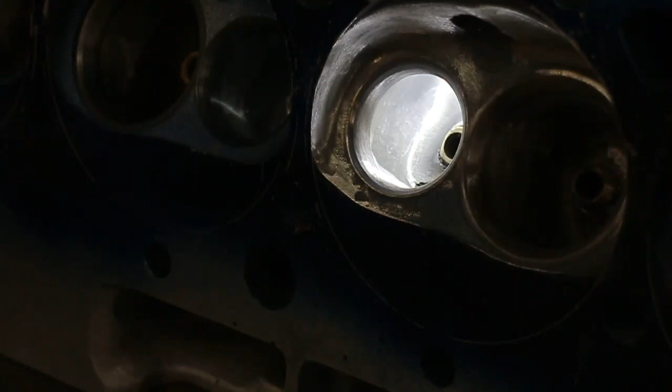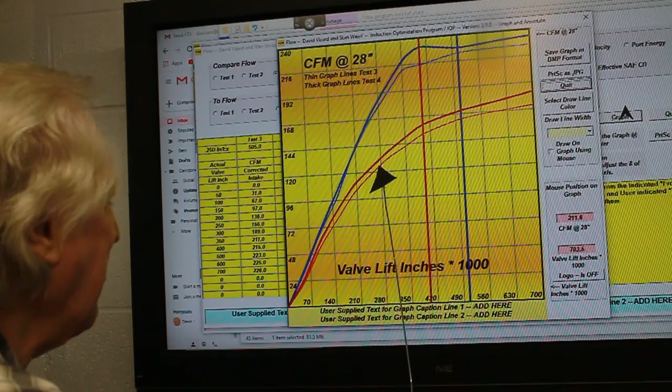We're going to now see if this extra bias emanating either to or away from the center of the cylinder pays off. Did that move pay off? Well, you bet it did. Look at this: increased our exhaust everywhere over the previous test. On the intake, same thing. But look, it dipped after that. Maybe we still don't have enough bias. Let's just check that out.

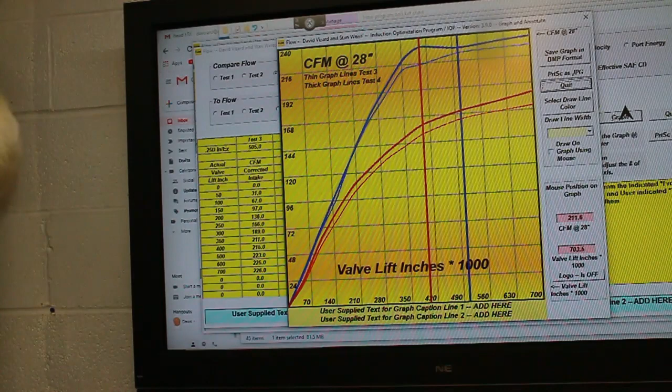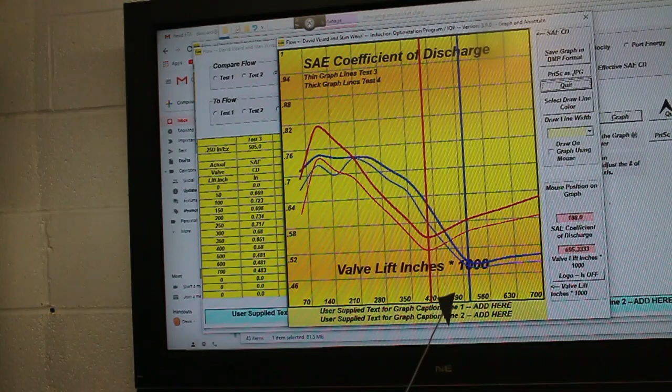Here's the discharge coefficient curves. We've moved everything up here, but look, it barely increases any more than it did before. So we need to give that some attention.

Well, so far I've walked you through these port mods a small increment at a time. If we keep on like this, we're going to be on this for about 2 hours. So I'm going to jump a few steps here, but each of those steps follows the same routine as we've already done. I'm going to increase the bias slightly, increase the width of the port slightly right across the port, and look at a few other details, such as the way on the intake the air turns on the top of the port into the cylinder center side. If you look down the intake port of any small block Chevy, you will see that the intake port, or the valve, is in a flow shadow on that side. We've got to try and get that air to go around the side as easily as possible. So we're going to look at mods like that and see where that gets us, and I'll explain each step of the way how that goes.

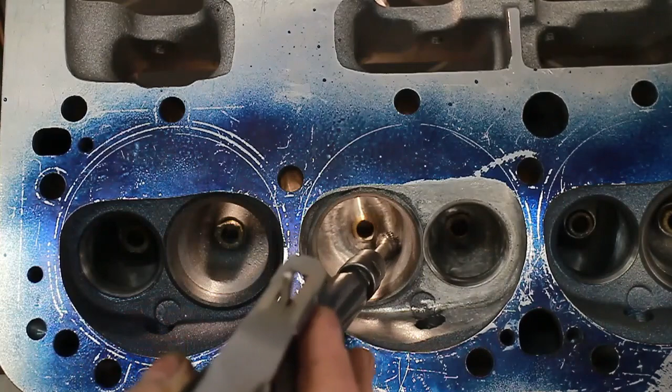To do this part past the bowl here, we used a ball cutter, half-inch ball cutter, and that's about the width you need to do there. Now, this is a little touchy point here. If you make this too big, you cut the swirl. If you have it too small, what happens is the gas speeds here are high, and they come up here and they prevent this stream from, A, entering the cylinder as easily, and B, swirling. So too big or too small, and you pay a price, either in flow or swirl or both.

Right, so that's the one to use for that. On this side, I used this ball wheel, but I finished it off with this 3/4 inch emery thing. So I made it as wide as I needed to and then finished it off with those. The rest of the port I did with this half-inch, 60 grit emery roll. Right, so that does it for the down the bore of the intake, or down in the bowl. Let's take a look at where the air goes in.

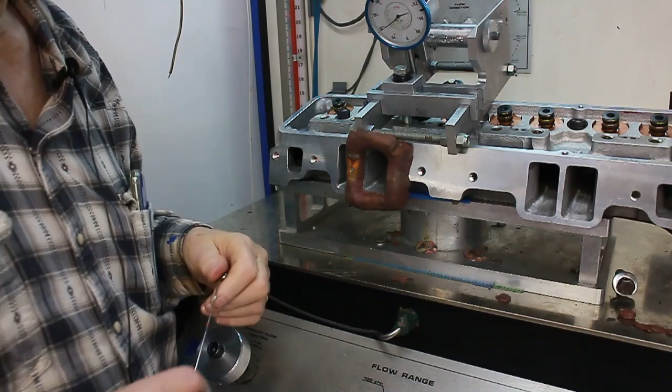So what am I doing here? I'm using this flow ball to check to see where the flow is going. Now, basically no metal has been removed from down here, and the interesting thing is, if we put the ball in here, it makes no difference to the flow. So basically this part of the port's redundant. On the other hand, where I spent the time doing the radius at the top of the port here, getting this wall here with a nice curve on it, if I get the ball at a certain position, the flow drops 25, 30 CFM. So that's a busy area, that's the place we need to work on.

But I don't think we can take much more out of that. But anyway, let's take a look at what we've done and then take a look at the results.

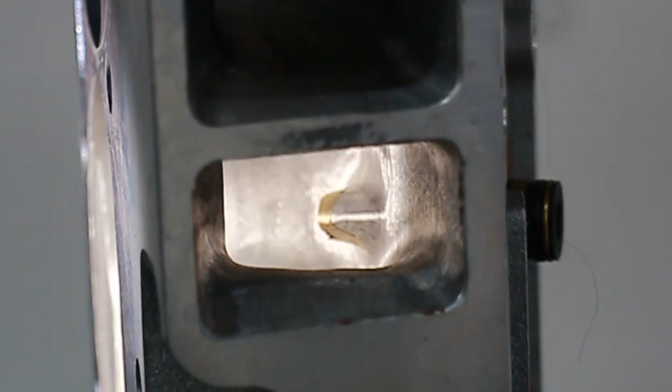What I want you to see is where I placed the flow ball when doing that test just now. Here on the roof of the port, this is a critical area. This radius needs to be as smooth and generous as possible, and you can actually widen it as well.

You can't go too far here. This is the pushrod pinch, and this has been widened to within 50 thousandths of the pushrod hole. A little bit of metal has been taken off on this side to get the area across here as large as conveniently and functionally possible, but almost nothing has been taken off here other than just to smooth it out. Right, so that's what we have for the throat there.

The actual area here has only increased very marginally. All the work on the port resulted in about an 8 cc gain in port volume, so not big.

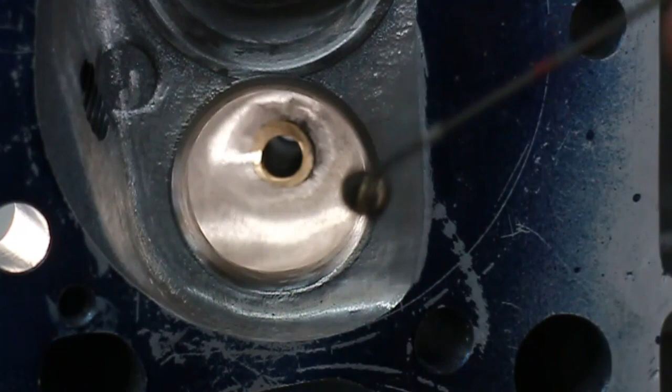Here's a shot looking down the exhaust port. What I've done here is take this wall down so that it's moved much nearer the cylinder wall, which is of course here, because the flow is going to be going out the cylinder about like this. So we need to give it room here.

It has a tendency to want more room this side than on the other side. That doesn't mean we ignore that, but basically we do the other side around here, the top side, with that 1/2 inch ball, but we do this here. We can do that with a 1/2 inch ball, but we need to make it wider, right here, and finish it off with one of those 3/4 inch emery rolls that I've just shown you.

Now coming off the seat here, we can skinny down the width of this radius and get that round, because once it gets past a certain point, it has very little effect on the flow. We don't want too much flow going out this side, because it'll shoot across the port that way and jam up the flow that wants to come this way, which is the preferred method of going out.

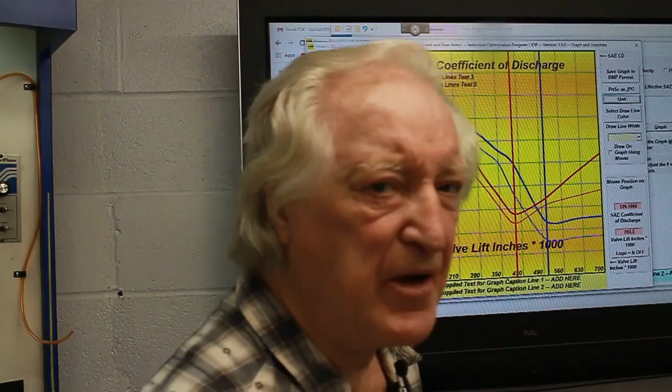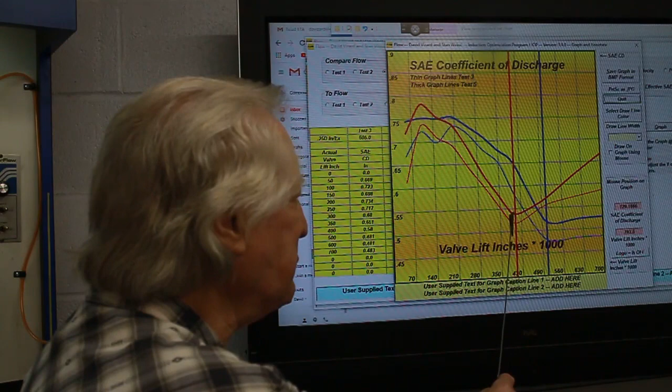Here is our CD curve, and you can see the form that the exhaust is taking. Notice how it's climbing very steeply after the lift gets past 0.25D. Here, the intake still is not climbing, but we'll give that some attention and see if we can fix that.

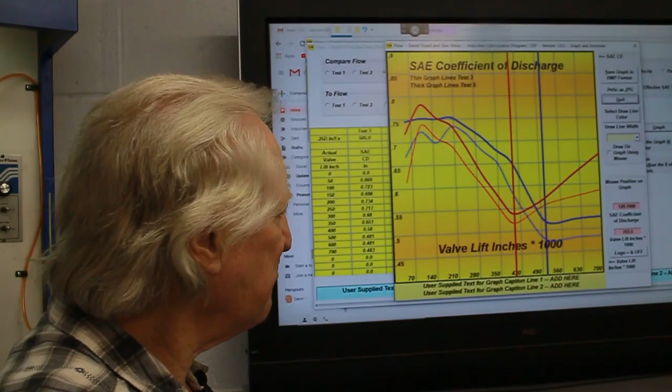Now, we took about 8 cc's out of the port to get to this, so let's have a look and see what our port velocity looks like.

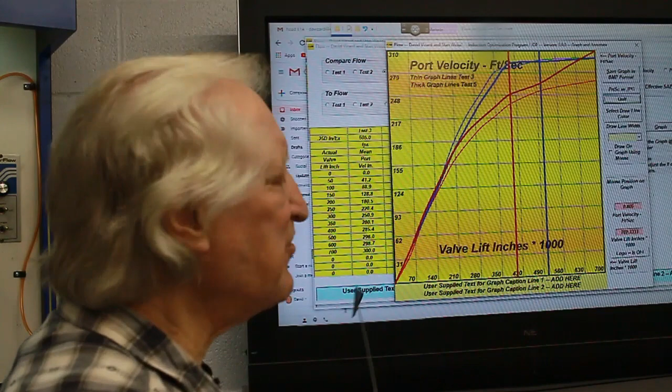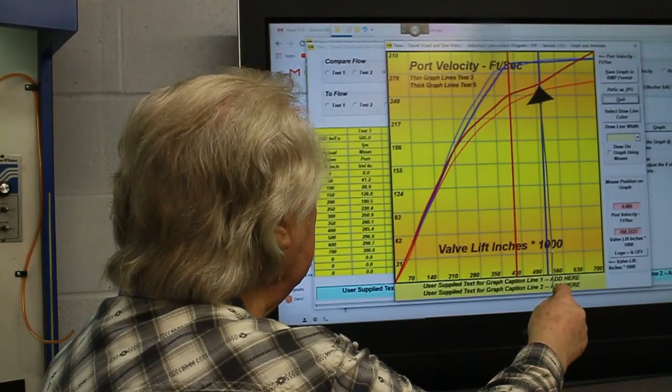Well, here we are, port velocity. We are sitting right on the 300 feet per second speed for the intake, and we are exceeding it at 700 on the exhaust, but we really need to have a little bit more speed in around here, so it's about 280. Maybe some work on the exhaust seat will help that, especially as it needs to get from the quench side into the port easier than we're allowing it with the pretty roughed up seat job that we've got currently existing on the head.

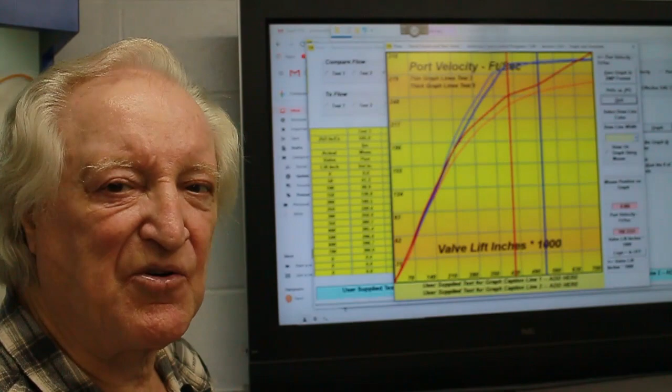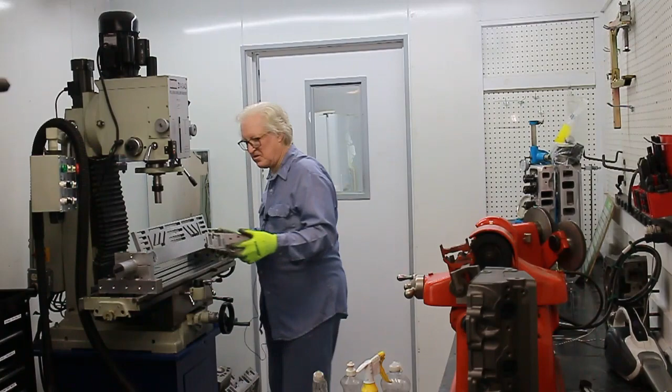Well, I've just done a finishing cut on the chamber we're working on, so let's take a look at that. Did that with my 3D Goodson cutter setup, which is done right. It's almost as good as a Serdi.

Here is the test cylinder or test chamber seat cut. I used a 3D pilot and guide like this. This is my bowl cutter. You see the form on that cutter there? It very closely matches that. So I'm going to try a cylinder over here using this because it will be much quicker and more consistent.

Anyway, seat details. Looking down on the seat, 50 thousandths wide. That's looking down this way. Looking at the seat across its width, that's 71 thousandths, right? That's Pythagoras' theorem to work that out. Anyway, a few points on this: any less than 50 thousandths on the bore, on the inside diameter compared with the outside diameter, you'll lose flow. This is the optimum size and it works very well for street or race.

The OD of the guide, let me get a caliper here. I don't know if you can see this because it will be upside down, but the seat is about 3 thousandths wider.

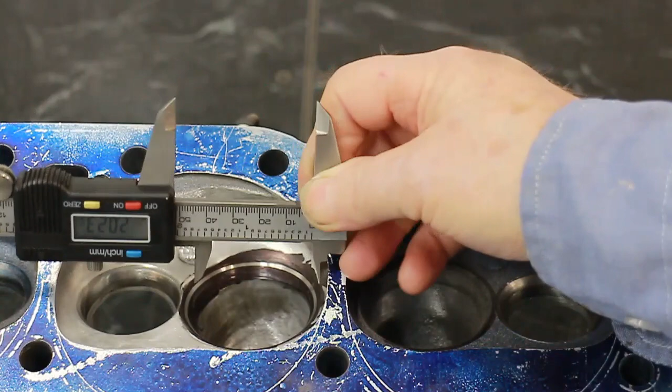About 3 thousandths wider than the valve OD. I like to cut them like that because it just seems to hang on a little bit better on the flow, and it flows slightly worse in reverse. Very small, but that's it. The best thing is about 3 thousandths to 5 thousandths bigger than the valve. Okay, I think that's it.

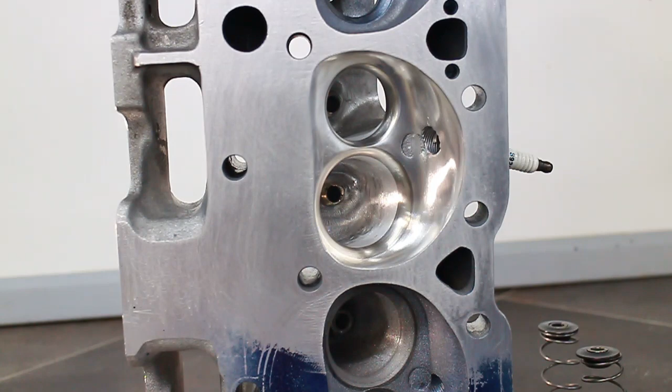Let's just get the cleanup done on that seat and we'll retest our cylinders. Seat's cut and the chamber finished off. But before I loaded it all onto the flow bench, what I wanted to do was to show some details.

First, if you look very carefully, you'll see there's a witness mark here. That's part of the original casting, right? It's not poor workmanship, not polishing it out. This area here, just here, you need to try and not take any metal at all off because it doesn't increase flow, it decreases it. We don't want air coming around there and out there. This could be part of the reason the port is getting shut off at high lift.

The seat itself is cut and I've polished it. Now I've got a technique I teach my students here, how to polish a seat with a tool that I've got, which takes off edges but has almost no effect on flat surfaces like the seats. Done on both valves here, right? The chamber's polished because that prevents stuff sticking to it as easy.

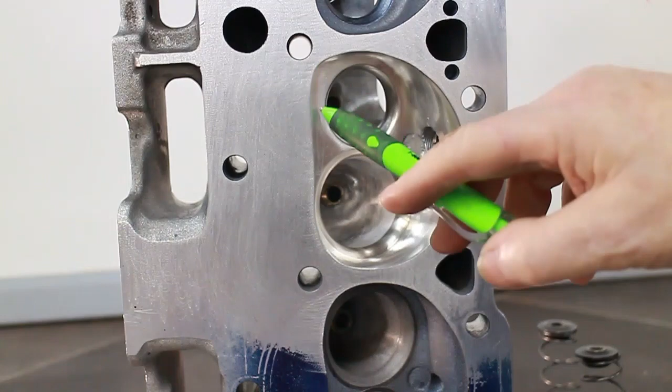Now, this area here, if you look at the pen reflection, you'll see that it's curved. This here curves it, this surface here curves into that one. Flattening this out like this is very important. This is 6 or 7 top end horsepower and no loss of torque anywhere in the power curve. Ports, seats polished on this, so that's good, and these are all area ruled.

One aspect that I didn't mention is, and you'll be hard pushed to see this, but the roll into this turn here, the radius here and here, that's from this segment right round to about here, is a bigger radius than this one. So the actual hole beneath the valve is shifted that way so that we get a bigger radius here where most of the air is flowing, and we try and cut the airflow here so that it doesn't come out, turn this way and affect the air trying to turn that way.

Right. It is now flow bench time.

Yeah, that flow testing looked good. Let me just score it and then we're done. As you can see, we've cracked the 200 CFM mark on the exhaust, and we've passed the 260 on the intake. It's not too bad a number for still what is a small port.

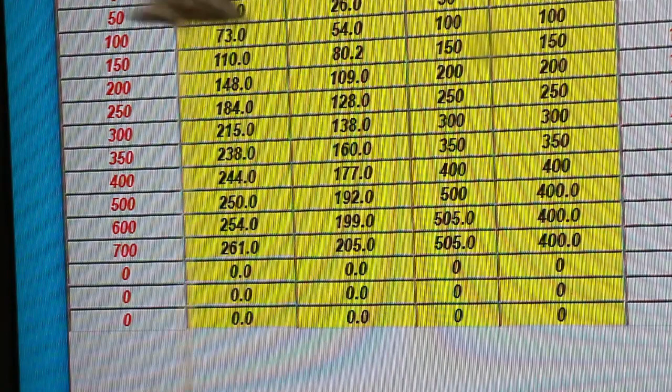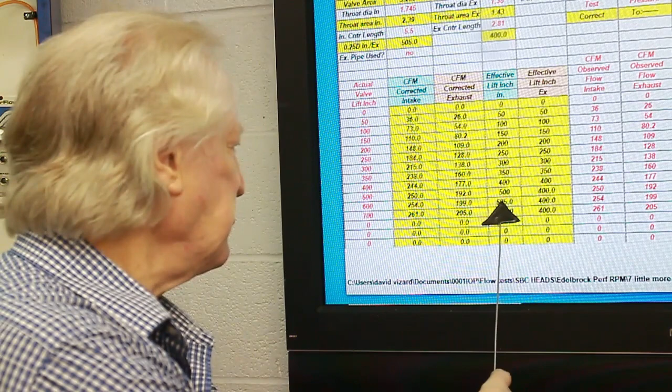Now, my son-in-law, who is a NASCAR engine builder and head porter, he's done a lot of pro stock stuff, and I believe he did Jimmie Johnson's engine when he won the Busch Championship. But anyway, he's got a benchmark which I think is very relevant on the exhaust. If you've done the exhaust well, you should be able to crack the 200 CFM at 500 lift. A proviso with that though: I think that's more in line with a port that's been slightly raised rather than the stock position of the Edelbrock port here. But we're getting close.

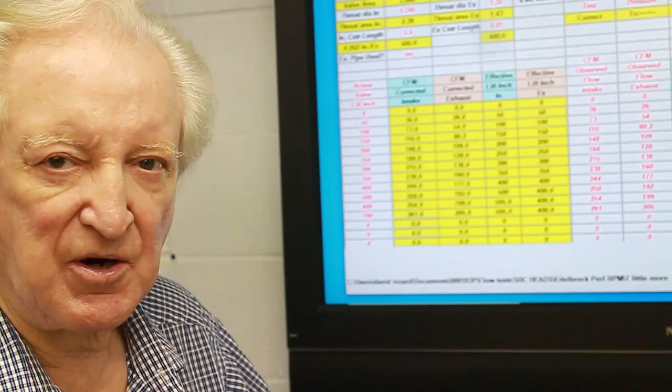Here's the CFM of flow test prior to the one we're looking at now and our current one. As you can see, pretty big gain in the exhaust here. But we've kind of developed a dip there. I don't know really what that is at the moment. Probably some little disturbance in the exhaust. But on the intake, you can see that we're starting to conquer that leveling out at the top here.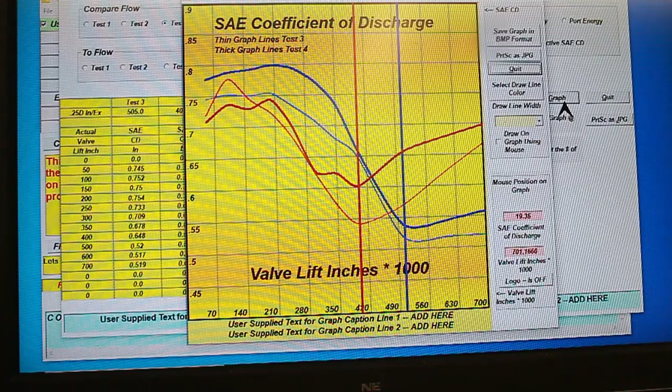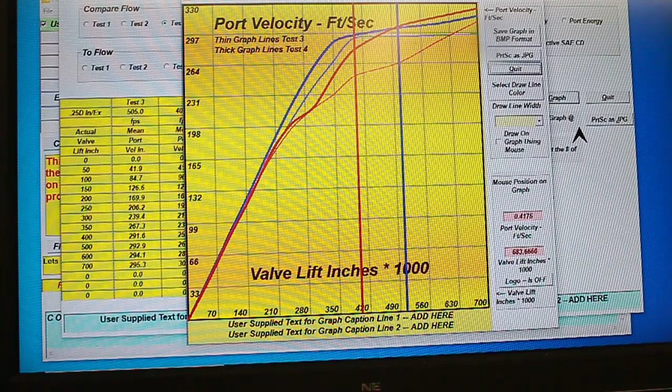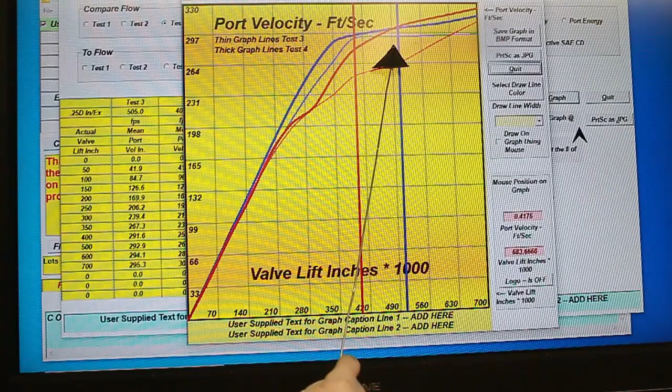But we need to check to see if this has come at the expense of any velocity. So let's look at velocity now, and there's the velocity. What we've done is we've increased the efficiency to a greater extent than we've increased the port volume. So not only do we have more flow, as shown by these two thick lines here, than the previous test, but we have more velocity, and that translates into more port energy.

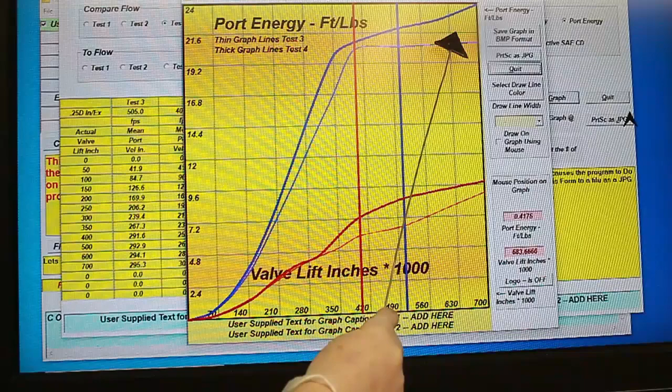We've gone up with port energy, and we've gone up on the intake, and we've gone up this much on the exhaust. This is all good. It improves the ramming efficiency and the lower speed tractability, especially when you've done it on the exhaust.

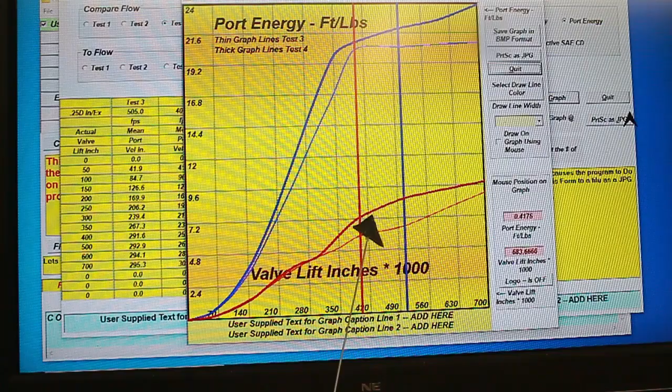Right, let's do our next test where we go in and detail out the ports. That is the finished finish on there, the final finish. Doing the lighting for some of this finished porting work can be a little difficult. It's out of screen at the moment, but I'm holding lights all over the place because I just don't have enough stands for it. Anyway, there you can see what a finished port and ports and chambers look like.

However, just visualizing it like this is not going to tell you very much. So what I'm going to do is take a mold of these ports, and you'll be able to see what's done far easier. Here's an intake port mold.

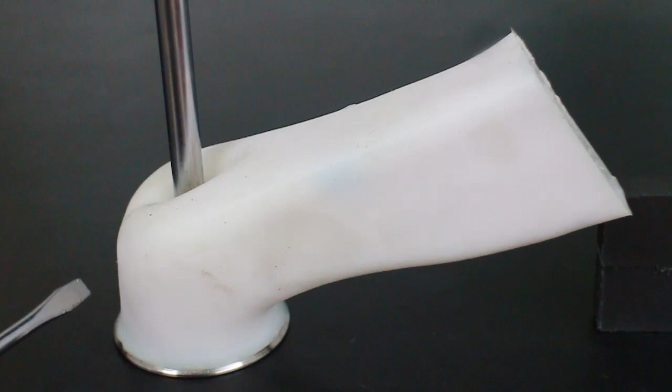Points to watch are this here. We can't get much more of a curve in here, not much metal has come off here, so this form here is not what I would call optimum, but it's what we're stuck with if we can only remove metal. Now, note this turn here. This is a big radius here and less of one there.

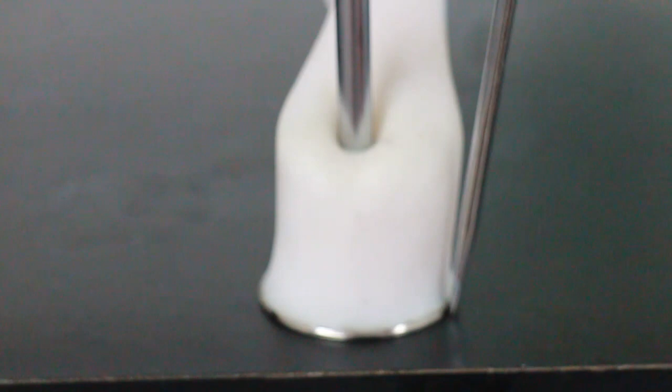Now let's just rotate the port so that we can see it end on with the bias. If you look carefully in this shot, you'll see how the port leans like this. The air comes in like this and goes out through the center of the cylinder. Note that this area here is cut away more than this area here.

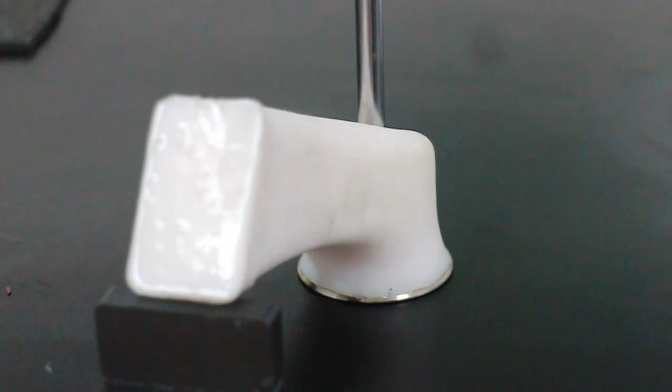In spite of the fact we've taken a mold, it's still difficult to see, but this turn here is critical. The radius on this wall here needs to be as large and as smooth as possible.

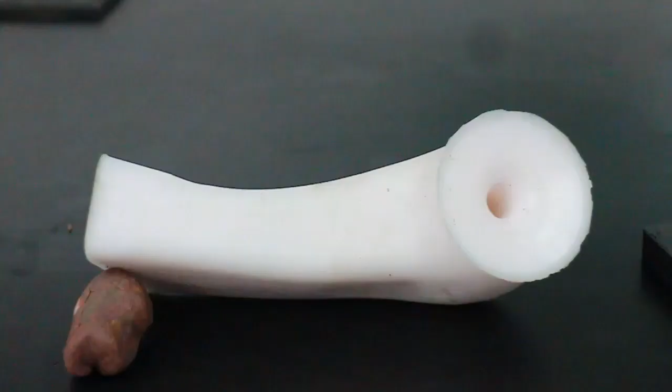You do not need to widen the port at the bottom here. All of the air is flowing, I say all of it, the majority of the air is flowing above about that line of my screwdriver there. This is a busy area right down through there, and so is that. That's where you should focus your attention. Do not widen the bottom of the port here, this is the floor, any more than you have to.

Another point to note is the short turn radius. Notice how it turns the sharpest by the seat, and the radius gets bigger and bigger as we go around.

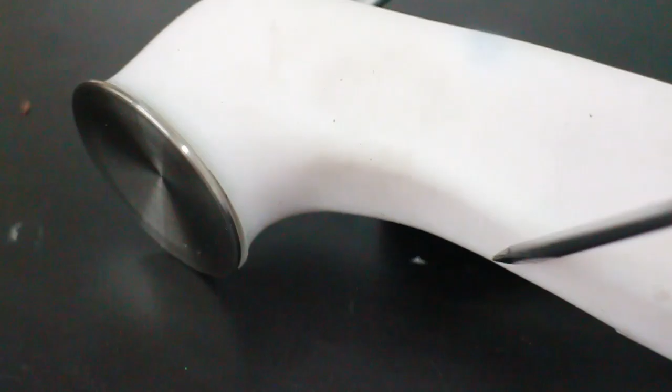By comparison with the intake, the exhaust is pretty easy to do. First off, notice how there's more metal off out to let the exhaust, it comes out the cylinder like this and out. So there's more metal off this side, and you can see it leans. Right, that's the bias on it.

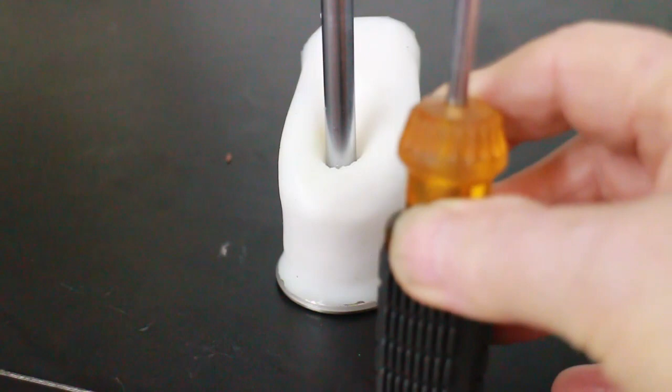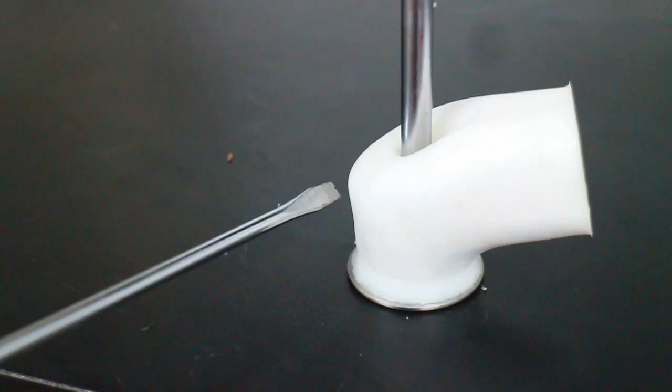Like the intake, the short side turn is critical, right? Starts sharp there and then comes out to a bigger radius. This wall here, the short side, the long side turn is almost stock. I'm not too happy with this straight up design, but that's what we've got. There's almost no material off here. So don't take any more than you have to.

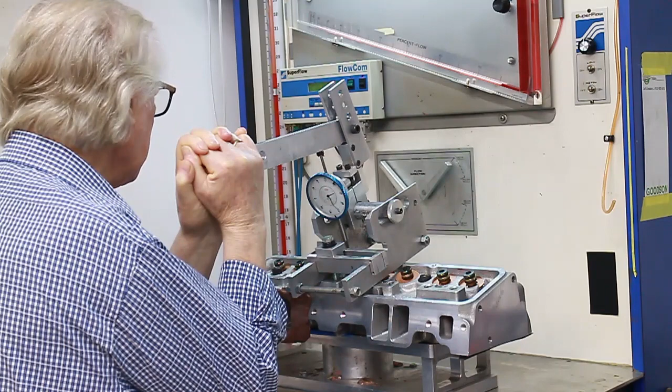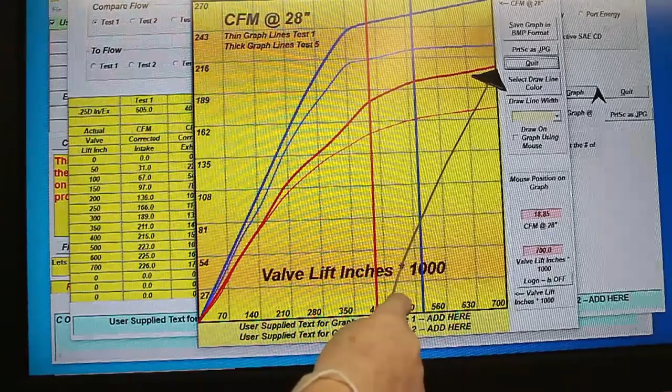Well, that was the last of the flow tests on the final detailed port. And it's looking good. So let's just check our results here. Here's our final figures. We're over the 200 mark by a respectable amount on the exhaust, and we are just shy of 270 up here. I did check at 50 thousandths higher lift. Still didn't make 270, it just leveled out at about 269.

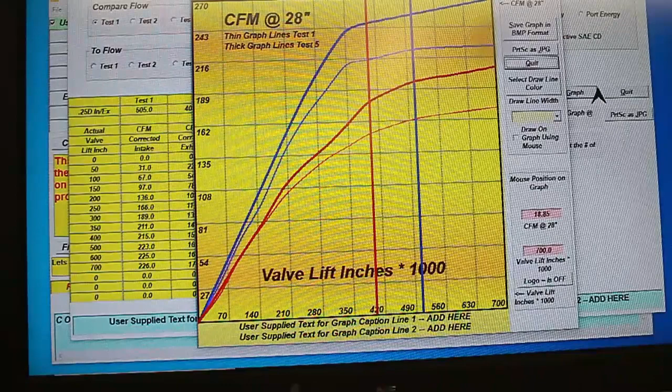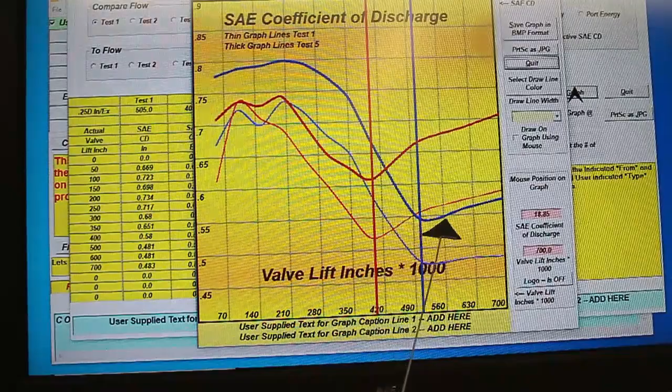That's all looking good. Now then, next move, just for a case of reference, let's have a look at our efficiency curves. Look at this. This is why we're doing so well here. Efficiency of everything has gone up a bunch.

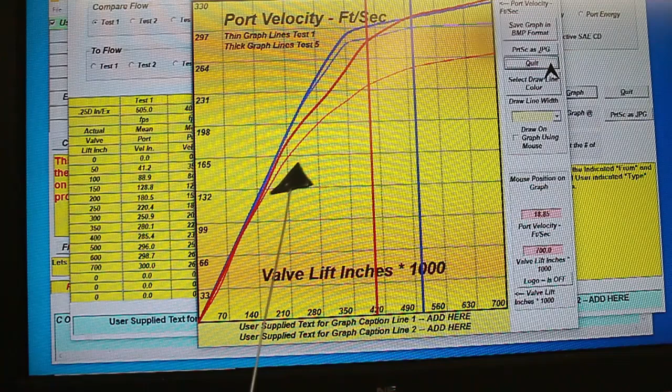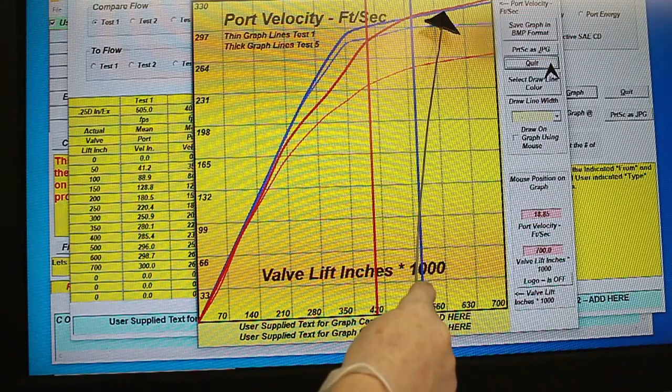Right, now let's look at the mean port velocity before and after. And what we have here is all that extra flow, plus we are over the magic 300 feet per second at the valve lift we're going to use. I think we're about 306 on both intake and exhaust. So we've scored well on that. Now let's have a look at the port energy.

Right, calculate, graph. Port energy, we are way up on the stock one. So that's a winner there.

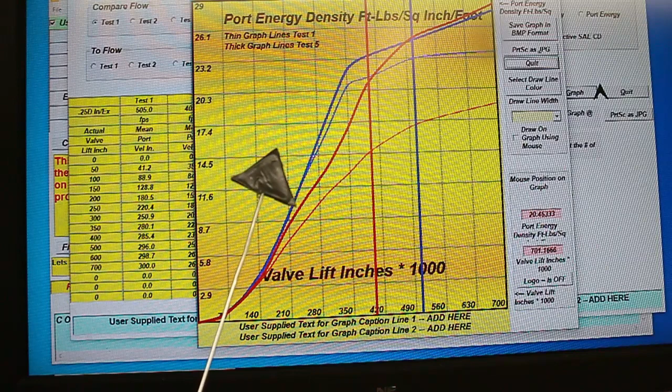Now let's have a look at the port energy density. This is going to require a quick explanation. The port energy density is something I teach my students. What it does is it allows you to grade the effectiveness of the cylinder head, because it removes the size of the port and the diameter of the valve from the equation. In other words, this is the specific energy, port energy. It's measured in port energy density, foot-pounds of energy per square inch per foot length of port.

We are in the very good territory here. A really good cylinder head is around the 26 on up. Formula One stuff's usually around about 34. Pro stock, 29 to 30. So we're doing well there, very well.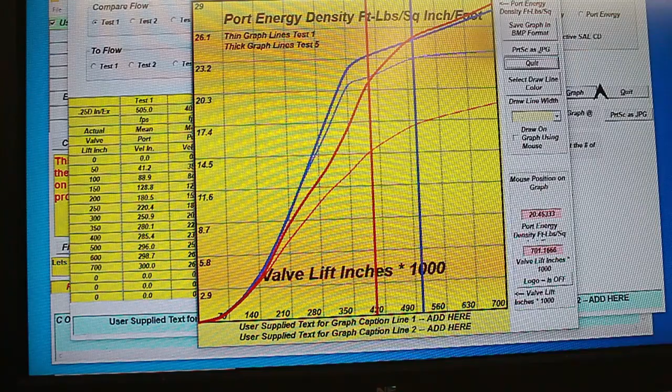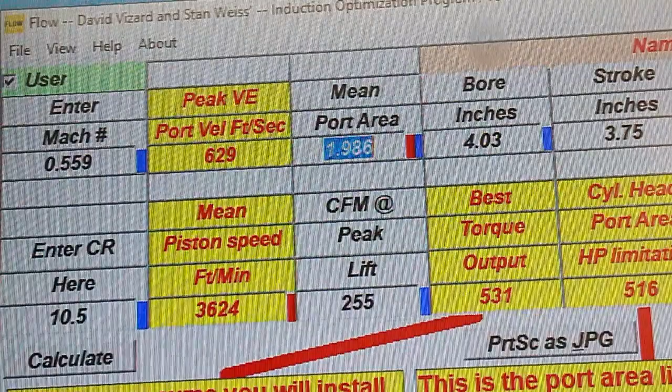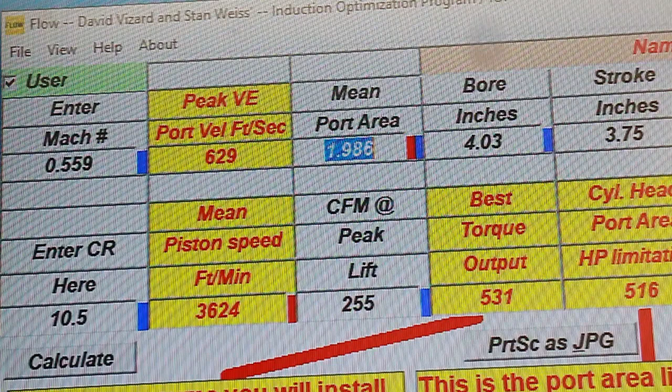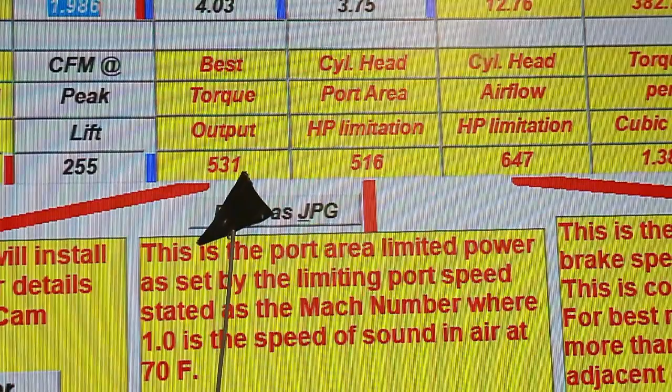But our next move is to see what this is going to produce in terms of power. We have 1.98 square inches. We have 255 CFM at our lift. And what that gives us for our engine is peak torque of 531 foot-pounds. Peak power 516 plus. It'll be a bit over that.

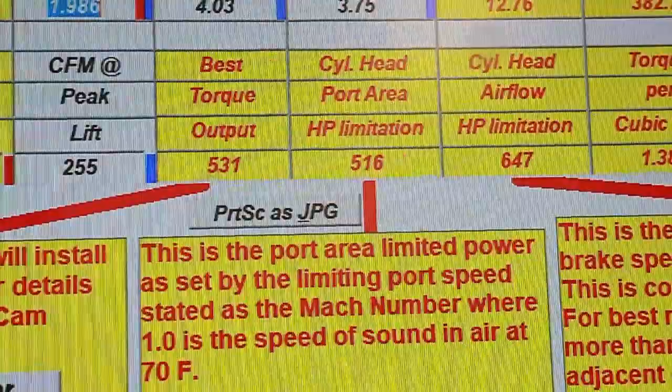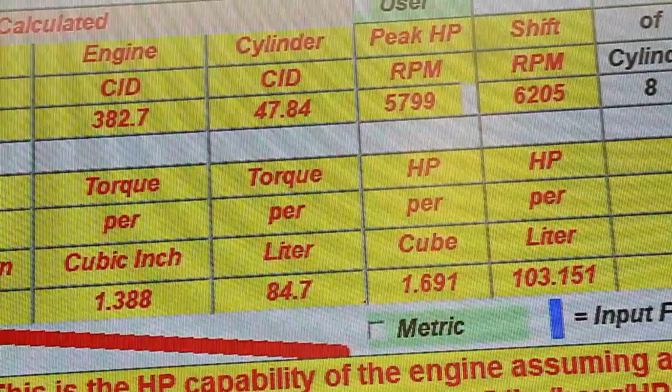So we've achieved the horsepower goals, but that's not all. Let's now look at the RPM at which peak power will occur. That will be peak power target RPM was 5,800. Program says 5,799. I think that's close enough.

Here's the finished product as far as one cylinder goes. Anyway, let me just say that the work we've put into this has paid off, because we've potentially gained something like 70 horsepower over the stock head in a street configuration. Not too shabby if you know what you're doing here as a gain from porting.

Let me make a point here on the horsepower business and the torque. Those numbers that the program presents are making the assumption that the engine builder knows what he's doing. In other words, he's putting together a bottom end that doesn't have excess friction in it. It's got a good piston and ring selection. The camshaft matches the cylinder head, and I'm talking about a proper match here. It doesn't matter how good your cylinder head is, if the rest of the stuff doesn't complement it, then it's all a waste of time.

Now, building combinations is not something that magazines do articles on very often, but my 3-day seminars, how to build horsepower seminars, that's the focus there. How to build a working combination, what effect one component has on another. This cylinder head here is going to deliver those power figures if the cam is right, the intake's right, the carburetor is the right size, the exhaust is the right size, etc. Those are very doable numbers.